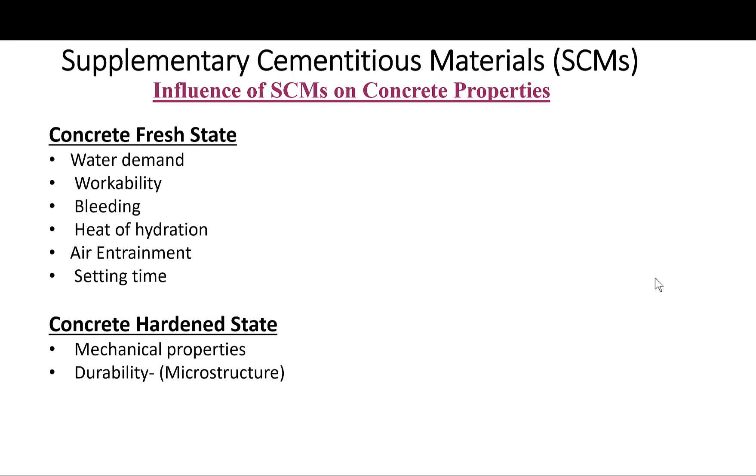So, the effects of SCMs on water demand. How does that happen? Fly ash decreases water demand, basically due to the ball-bearing effect of the spherical particles. So for every 10% replacement of fly ash, there is a 2 to 3% reduction in water demand. Reduction in water means better durability.

Silica fume may increase or decrease the water demand depending on the replacement level. For 2% replacement, water demand is reduced. For more than 5% replacement, water demand is increased, due to the very fine and sticky nature of the silica fume, handling becomes difficult. For slag, it reduces water demand. So if you compare these three products, fly ash, slag, and silica fume, the most reduction in water demand comes from fly ash, followed by slag, then silica fume.

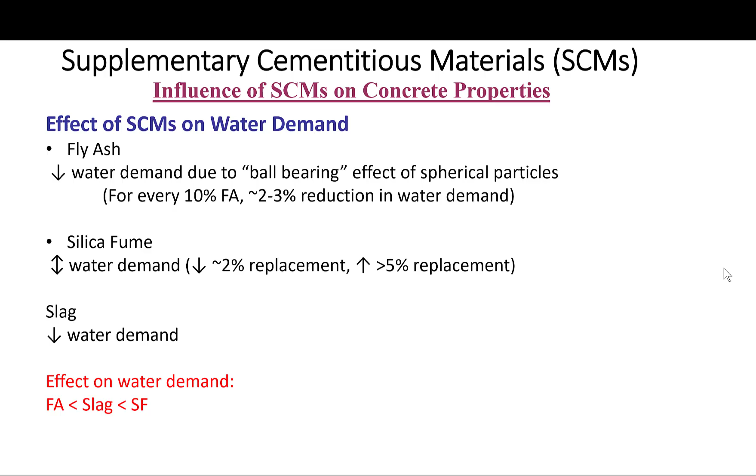Now the effect on workability, which is also a big deal. Silica fume containing concretes tend, as we said before, to be sticky and more difficult to finish, leading to decreased workability. In that case we will need to add high range water reducers in order to improve workability, rather than adding water. We have the blessing of using these admixtures, which we will talk about in the next module of the class. Slag and fly ash generally improve workability.

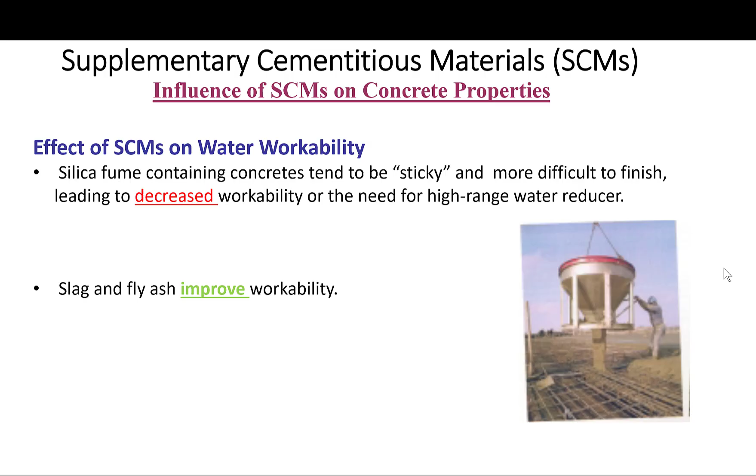As far as the effect on water bleeding, fly ash reduces bleeding. Slag may increase or decrease bleeding depending upon the fineness of the slag particles; fine particles decrease bleeding while coarse particles have less of an effect. In the case of silica fume, it decreases bleeding and may eliminate it altogether, making finishing difficult. So you have to remember, when adding silica fume, other measures have to be taken to ensure good finishability of our concrete.

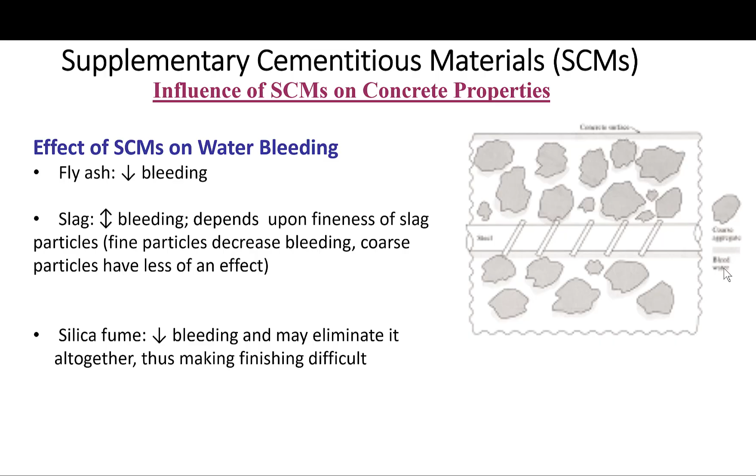On heat of hydration, in general, most SCMs reduce the overall heat of hydration and rate of heat liberation. This is good for mass concrete or large sections, and for concrete in hot weather. The introduction of SCMs really eliminated the need for type 4 cement, the low heat of hydration cement, because this is a cheaper, more convenient way of reducing the heat of hydration.

So let me just say the following: mineral admixtures reduce the overall heat of hydration, and in particular the rate of heat liberation, which controls the temperature rise in hardening concrete. The use of a mineral admixture is equivalent to raising the C2S content of a cement, and effectively turns type 1 cement into type 2 or type 4 cement.

As I said, the use of pozzolans in mass concrete has eliminated the production of type 4 cement in the US, except of course for oil well applications. If you remember, we talked about special cements and oil well cements in the types of cement lectures. Low heat of hydration is still an issue there, although these cements are still produced in Canada.

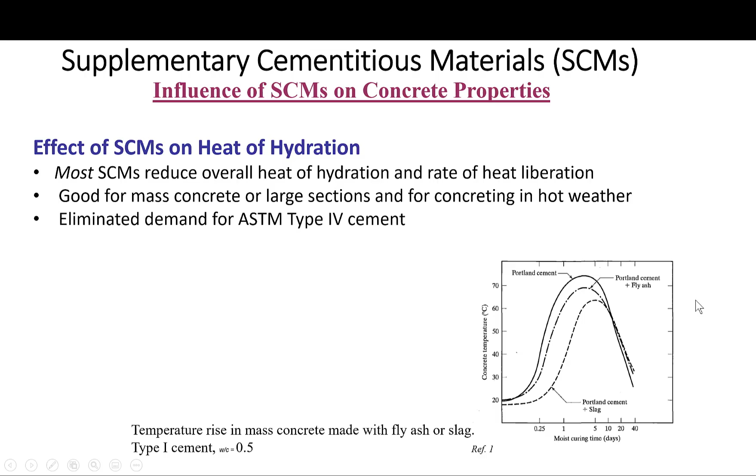As for the effect on air entrainment, concrete containing mineral admixtures still must be air entrained for frost resistance, which will be discussed later, unless the water to cementitious material ratio is below 0.24. In that case there's a different set of requirements, which is high performance concrete, and there may not be a need.

The addition of a mineral admixture will often change the amount of air entraining agent required to achieve a specified air content. This is usually due to the residual carbon within these admixtures, which strongly inhibits air entrainment, especially when fly ash or rice husk ash are used. But even carbon-free pozzolans can affect air entrainment, so appropriate adjustments must be made when proportioning such concretes.

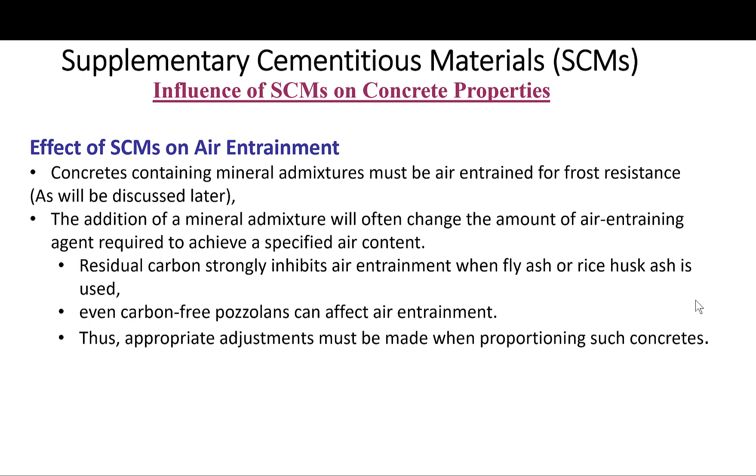Again, trial mixes are key in order to be able to understand and really verify the effect of any addition to the concrete mix.

For setting time, generally slag and fly ash lengthen the setting time by about 15 to 60 minutes for the initial set, and somewhere between 30 to 120 minutes for final set. Class F fly ash lengthens setting time even more than Class C, of course depending on the chemical composition.

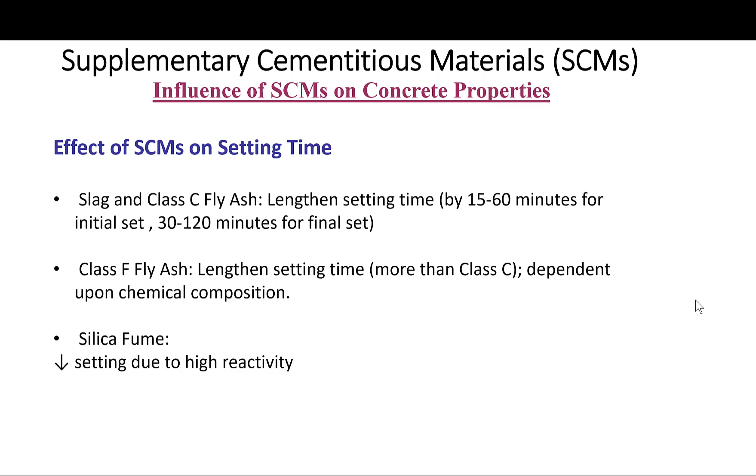Class C contains lime, that's why probably. The silica fume reduces setting time, of course, due to its high reactivity, as we mentioned several times before.

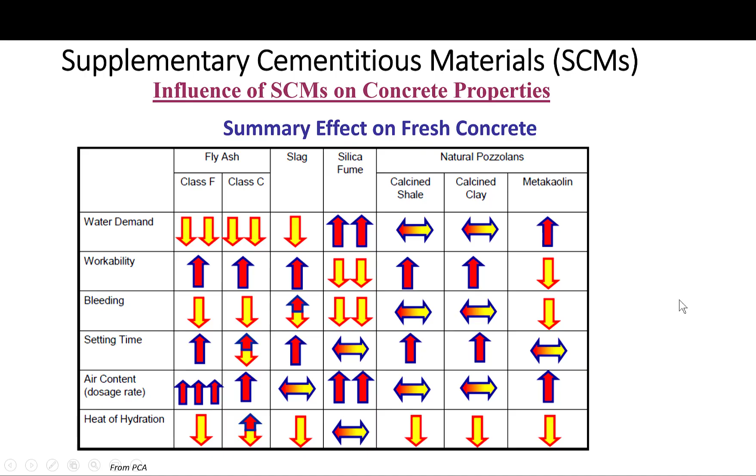So let's move on and see what's the effect and how these mineral admixtures, or supplementary cementitious materials, impact the microstructure.

Mineral admixtures modify the microstructure of the hydrated matrix quite significantly. The increased fraction of calcium silicate hydrate, due to the pozzolanic reaction, leads to a more homogeneous microstructure, particularly when highly reactive, finely divided pozzolans are used.

The residual calcium hydroxide crystals are usually smaller and can have altered morphology. So the principal effect on the microstructure is the change in pore structure. Admixture reactions will reduce the overall porosity, because the specific gravity of calcium silicate hydrate is lower than that of calcium hydroxide.

They will also reduce the pore size, not just the overall porosity. However, a reduction of porosity requires extensive pozzolanic reaction produced by prolonged moist curing. Again, we go back to the practices in the field - moist curing is key in this case.

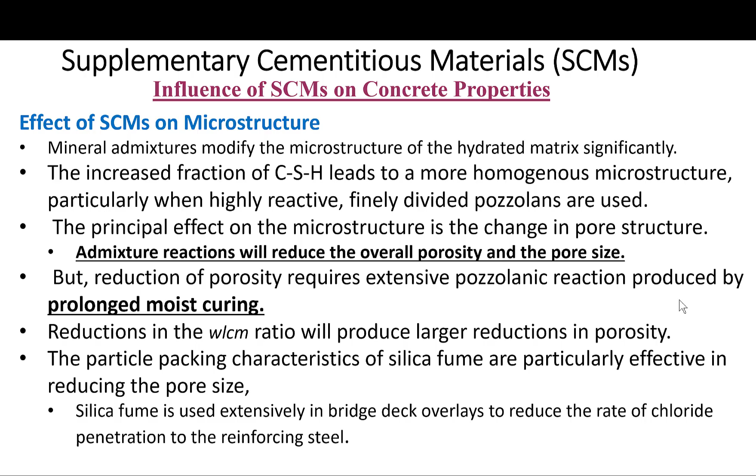The effect of the mineral admixtures on pore size distributions is summarized on this figure - this is a familiar curve. This is a comparison of the size distribution of a cement paste made with mineral admixtures, using mercury intrusion porosimetry. This is the accessible pore volume, and this is the effective pore diameter. You can see the reduction here in the threshold pore diameter and the effective, or critical, pore diameter.

This is the control mix, and this is the fly ash replacement, lower. This is for the silica fume, which is even lower, and with slag it's lowered even more. The effect of slag here may be due to the higher replacement, but nonetheless this gives an indication of how the use of these mineral admixtures or SCMs will refine the pore structure by reducing the overall porosity and pore size.

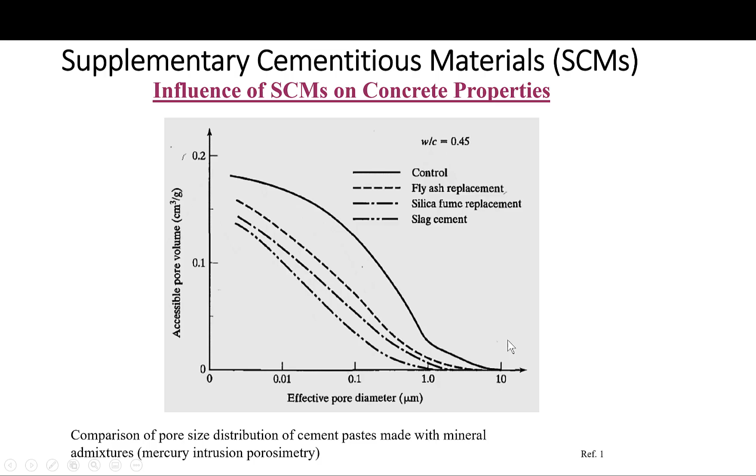On strength development, concrete containing mineral admixtures will develop very good strength over time, exceeding those of similar concretes without admixtures. The extent to which the replacement of cement by mineral admixtures will lower the early strength depends on their reactivity, as we will see in the next slide.

Reductions in the early strength can be offset by lowering the water-cement to cementitious materials ratio, along with the use of water reducing admixtures. At early ages, some mineral admixtures essentially behave as an inert addition, so the cement reacts with an effectively higher water-cement ratio at the beginning. However, highly reactive pozzolans such as silica fume, calcined clay, or rice husk ash will actually decrease setting time slightly and contribute to early strength.

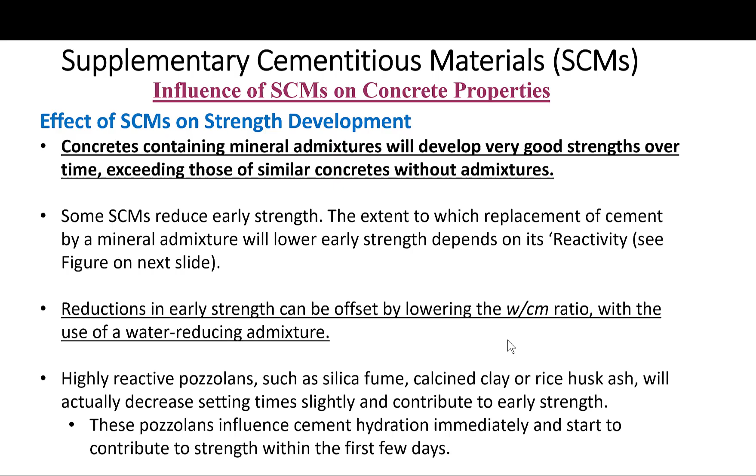The pozzolans influence the cement hydration. These three I just named influence the cement hydration immediately and start to contribute to the strength within the first few days due to their high reactivity.

This figure shows the effect of adding various mineral admixtures to the strength. Let's talk about the control mix, shown with the solid line. You can see the Class C, Class F fly ashes, and the slag replacements all have lower early strength up to almost 14 days, and these are almost up to 28 days for the Class F fly ash. After that, of course, they all show higher strength.

The silica fume and the rice husk ash both had higher early strength than the control mix, as we mentioned on the previous slide, due to their high reactivity. But overall, long-term strength is higher for all SCMs at all replacement levels.

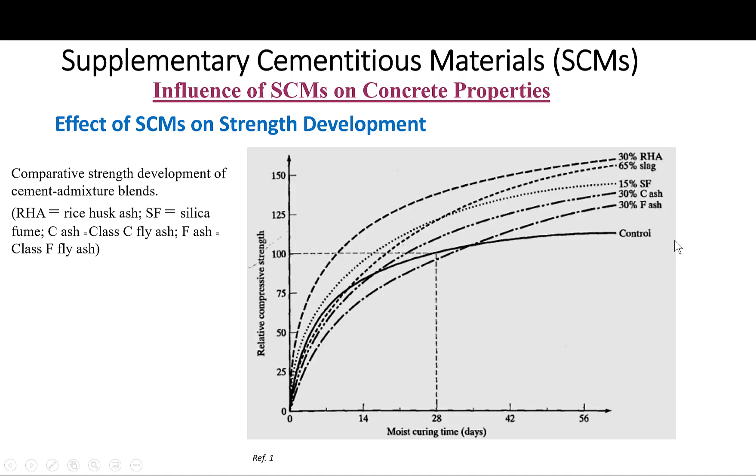Okay, let me go back here.

As for the effect on durability, mineral admixtures are used extensively for improving the durability of concrete, resulting in better sulfate resistance, as I'll show on the next slide, control of the alkali-silica reaction, decreased chloride diffusion, and reduction of leaching and efflorescence. This is because we removed the calcium hydroxide in the pozzolanic reaction.

So improvements in durability result from the reduction in calcium hydroxide, which is the most soluble of the hydration products, also from changes in the pore structure as shown previously, and the reductions in the water to cementitious material ratio. All three factors combined result in improved durability and change in the pore structure.

The natural pozzolans were first used in the U.S. to add resistance to sulfate attack in structures in California, as you'll remember from the introduction.

So pozzolans reduce the amount of ettringite that can form in several ways. Firstly, they reduce the permeability of the concrete and inhibit the ingress of soluble sulfates. Secondly, they reduce the amount of calcium hydroxide, remember, calcium hydroxide is taken from the system. By doing this, they limit the formation of gypsum from soluble sulfates, because soluble sulfates react with calcium hydroxide to form gypsum, which participates in ettringite formation.

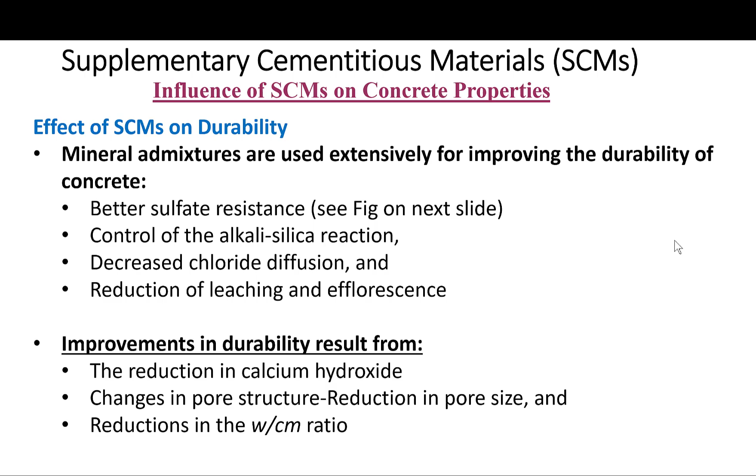As we mentioned, it's also known that not all pozzolans improve sulfate resistance to the same extent, since those with high alumina content can form the calcium aluminate hydrate compounds I showed in equation number 3 before. These compounds will increase the potential for ettringite formation. Also, the increased calcium oxide content in Class C fly ash will reduce the consumption of calcium hydroxide in the pozzolanic reaction.

So the benefits we get from the fast removal of calcium hydroxide from the system will be less effective in the case of Class C fly ash, for example.

This figure, as mentioned previously, shows the potential linear expansion of the concrete versus exposure time in months. This is the control mix, and here is the replacement with slag, which is the best performing. This is with silica fume, and this is with fly ash replacement. So evidently there's an improvement in that aspect, where the linear expansion has been reduced.

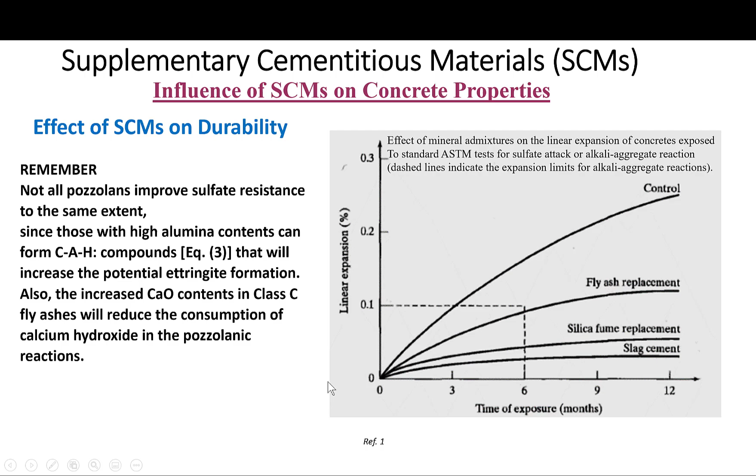As far as durability, the reduction in pore size results in a decrease in transport properties, water permeability, and ionic diffusion. These are basically the rate-limiting properties in any chemical attack: permeability and transport properties. So using SCMs will do a lot in this case.

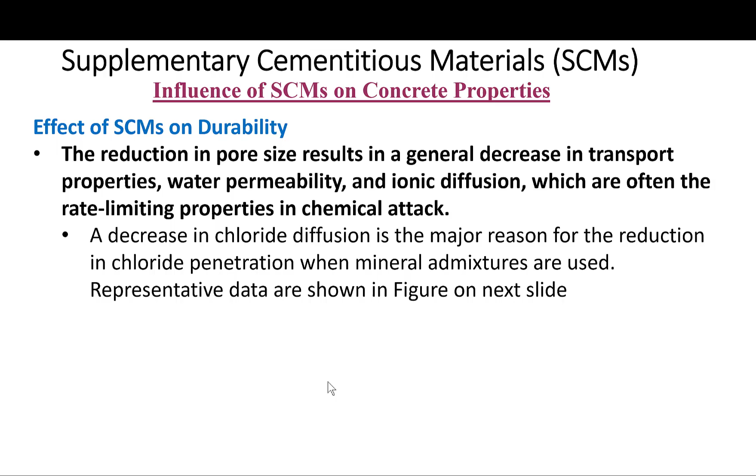A decrease in chloride diffusion is the major reason for the reduction in chloride penetration when mineral admixtures are used, as you can see in this figure showing chloride penetration into the concrete mass, percent in the top 25 millimeters, versus time of exposure in days.

You can see this is the control mix, and this is the control mix with a higher water-cement ratio, which is even worse. Look what happened when we add SCMs with 25% fly ash replacement - there is definitely a decrease.

Look what happens when we replace 40% with slag. Look what happened when we replace 10% with silica fume. Remember we said silica fume is used in overlays, bridge deck overlays - just see the improvement from using none to 10% silica fume.

This is with high replacement with slag, 70%. Of course, replacement with slag at this level is only probably recommended in few cases - sometimes when you need early strength, you cannot use this much replacement of slag. But in certain applications where early strength isn't important, the benefit in terms of durability could outweigh the other benefit.

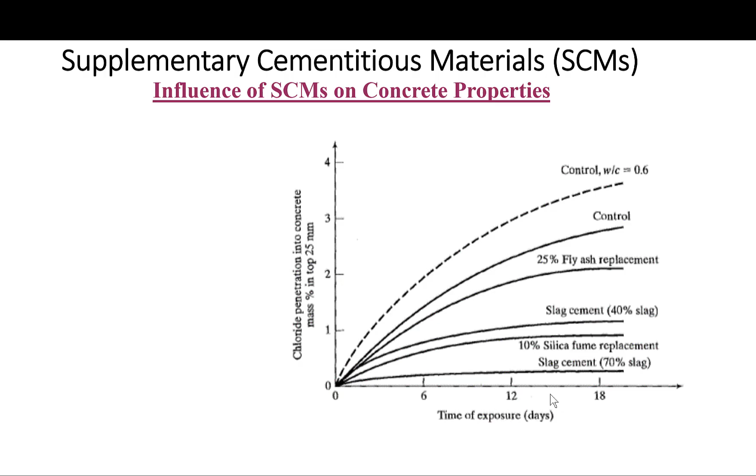So basically, from this presentation, you could see how these SCMs improve concrete properties. Here is a summary similar to the one I showed for fresh properties - this is the effect on hardened concrete properties, and you can see almost a benefit in every way we use these materials. Great materials to use - waste products are being turned into magic products to help improve concrete durability and sustainability.

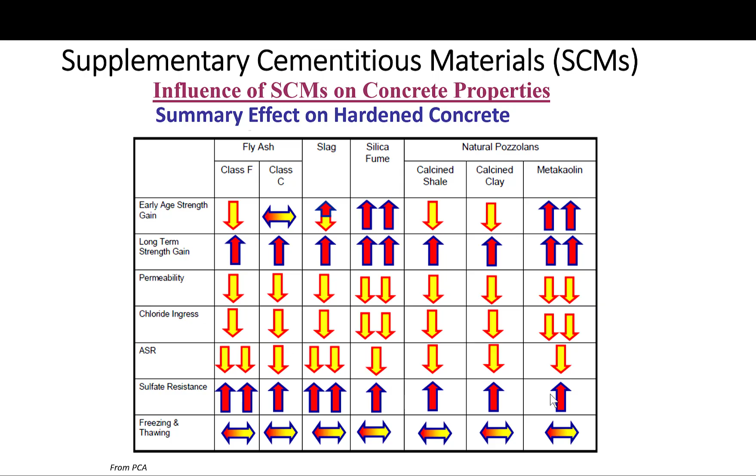Okay, so now we finished the talk about the SCMs. Let's talk about the remaining topic, which is the blended cements. As I mentioned, I'm going to cover this topic after we finish the SCMs discussion.

Although most pozzolans and slags are used as mineral admixtures, a few cement companies, maybe some in the US and Canada, offer Portland pozzolan or Portland slag blended cements. In Canada, a Portland silica fume blended cement is also available. So you have to be careful sometimes when using certain cements - some ready-mix suppliers may use blended cements and still refer to it as Type 1. You have to verify the mill certificates and make sure what is being used.

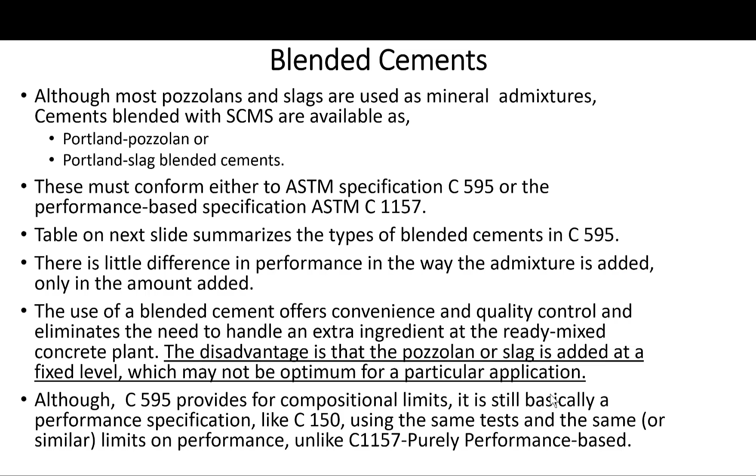These blended cements must conform either to ASTM specification C595 or to the performance-based specification ASTM C1157, if you remember. This table summarizes the types of blended cements according to ASTM C595. There is little difference in the performance based on the way the admixture is added, only in the amount added.

The use of blended cement offers convenience and quality control and eliminates the need to handle an extra ingredient at the ready-mix concrete plant. The disadvantage is that the pozzolan or slag is added at a fixed level, which may not be optimum for a particular application. So my personal preference is to always use it as an addition at the concrete mix supplier rather than the use of blended cements. And again, I'm not saying do not use them, but this is my preference.

So while ASTM C595 provides compositional limits, it's still basically a performance specification. Like C150, it offers composition limits and also uses the same or similar tests and limits on performance. Unlike that, C1157 is purely a performance-based specification with no compositional limits imposed, as you remember we talked about.